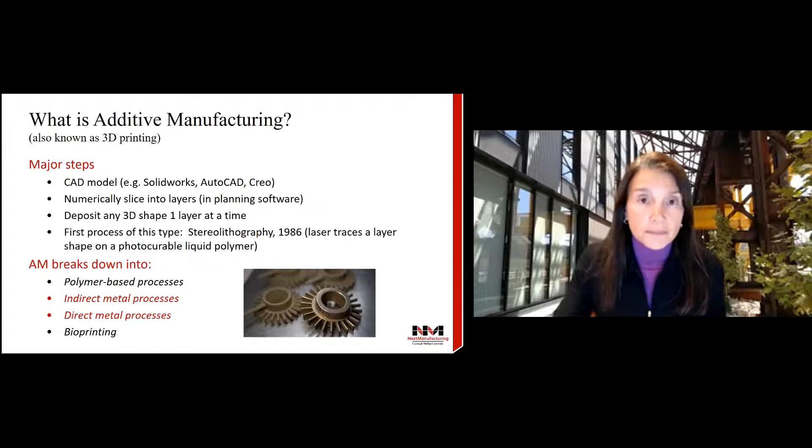So why all the interest in additive manufacturing or 3D printing? Even though this has been around since the 80s, there were a couple of developments about 12 years ago that generated a lot of interest in the population and in industry. The first was maker machines, desktop 3D printers for polymers or plastics that hit the market—MakerBots, Cube Pro, Form One. These were high resolution polymer machines costing about $2,500, some about $1,000 and less. Today you can get a desktop plastic 3D printer for home use for under $500, even just a few hundred dollars. They're popping up in a lot of middle schools, high schools, libraries, and community centers. Around the same time, automated metal 3D printers came online.

There were two different processes introduced at this time: one called a laser powder bed process, and the other an electron beam powder bed process. I'll talk about both as we go on. Both use metal in a powder form, much like cinnamon or flour in consistency—tiny metal particles. You use either a laser or an electron beam as the energy source to bind particles together as you print one layer at a time. I've got some videos to show you each of these processes. This was really the first time the industry demonstrated you could make a generic 3D shape automatically out of real engineering alloys—not just plastics, but titanium, aluminum, steel, nickel alloys, and other alloys in great use today.

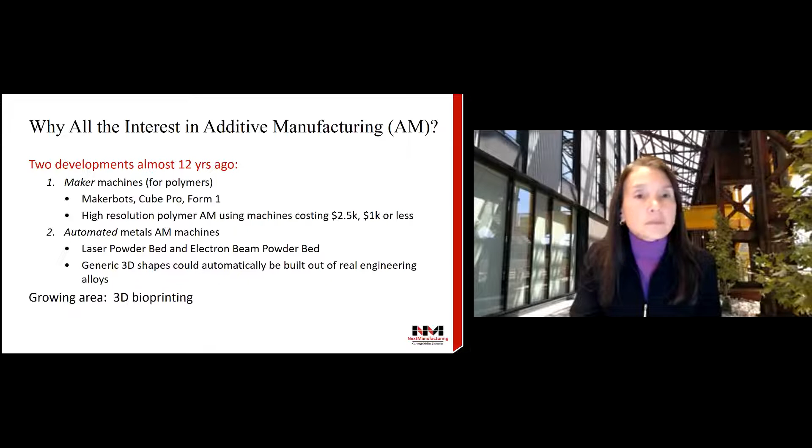Let's talk first about indirect metal additive manufacturing. These were the first practical attempts to make metal parts. Basically, you print with a powder and use a binder. Instead of using a heat source to make metal powders melt and stick together, they use a binder that's like a glue, then put it in the oven to solidify the whole thing. Then it has to go into another process, into a furnace, to really sinter the part—getting the particles to partially melt and stick to each other so you have a solid part.

This process was introduced by a local company, the ExOne company, which is in North Huntingdon, PA—actually one of our partners. These approaches are pretty well established, and there's a lot of research happening right now in this area. It's an inexpensive form of metal 3D printing and it has a lot of attention right now.

On the next slide, I'm going to show you a video of our binder jetting machine that we have in our lab, and I'll explain a little bit about how it works.

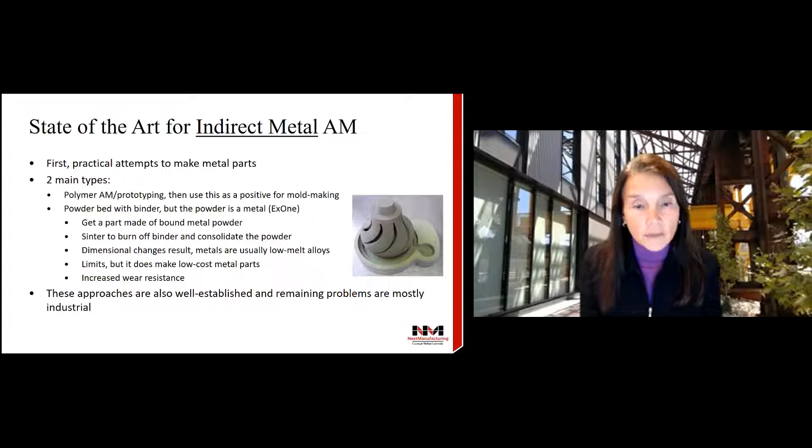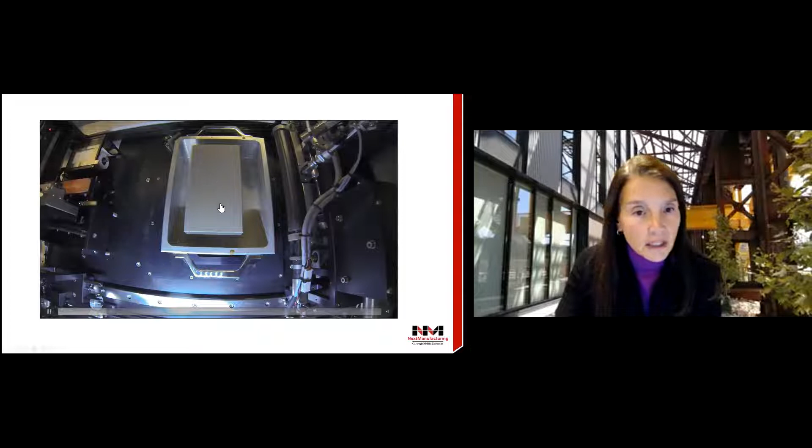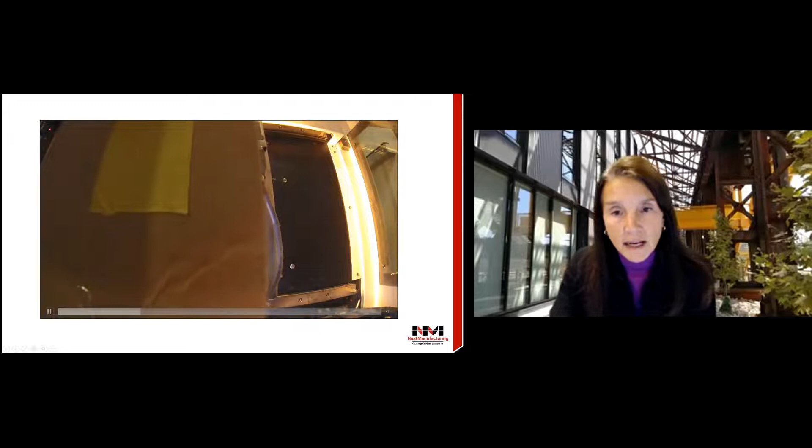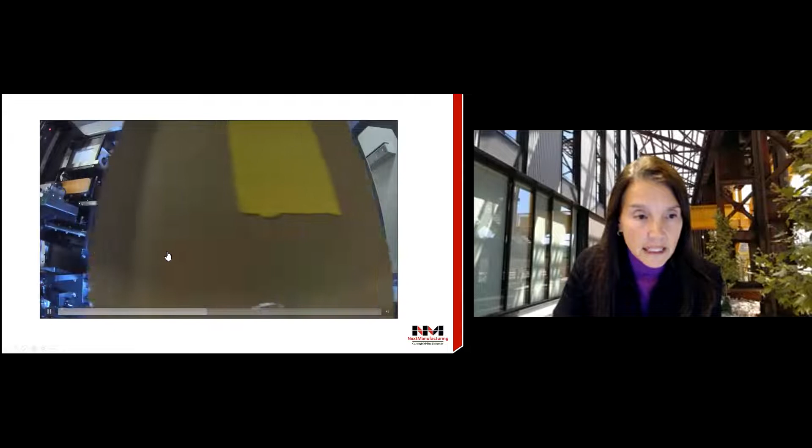This is one of our students, Luke, in our lab. What you can see is what we call a build box, and it actually has powder in it. In this area, this is a bed of metal powder—stainless steel powder that's just sitting here waiting to have a process done. So what's happening now is that plate had dropped down, and now we need to fill that area with powder. This is coming across, with a light that's preheating the bed a little bit. It's dropping a pile of powder in this area, and when it goes back, it's going to use a roller to spread that powder out nicely so that we have a very smooth, even layer.

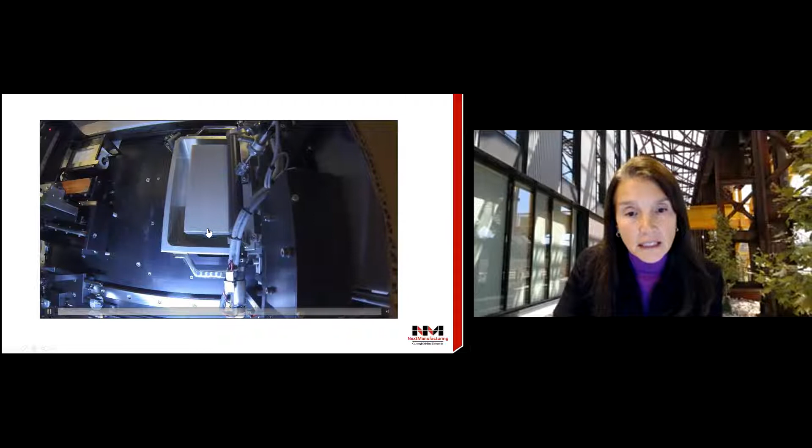So you can see the roller right here at the edge, the black roller that's rotating. And now we have a perfectly flat powder bed. Over on the left side, this is the printhead.

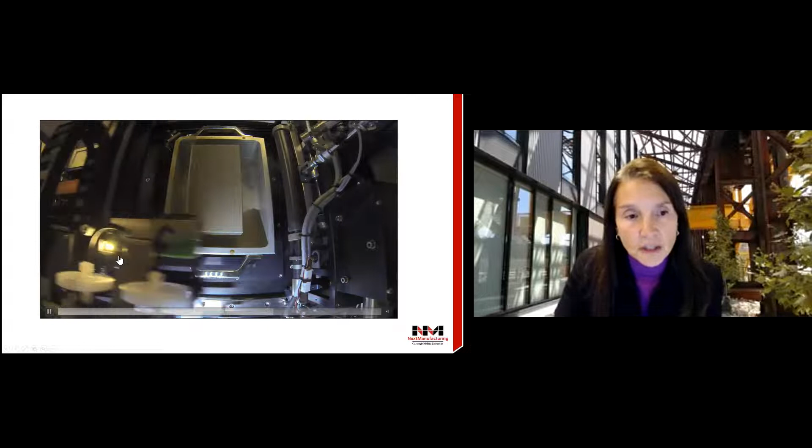This type of process actually works very much like an inkjet printer that you would have at home. So it comes out, and you see the head is going back and forth, dropping binder particles, or glue droplets basically in the shape of a circle, and they're going to do many of them at once.

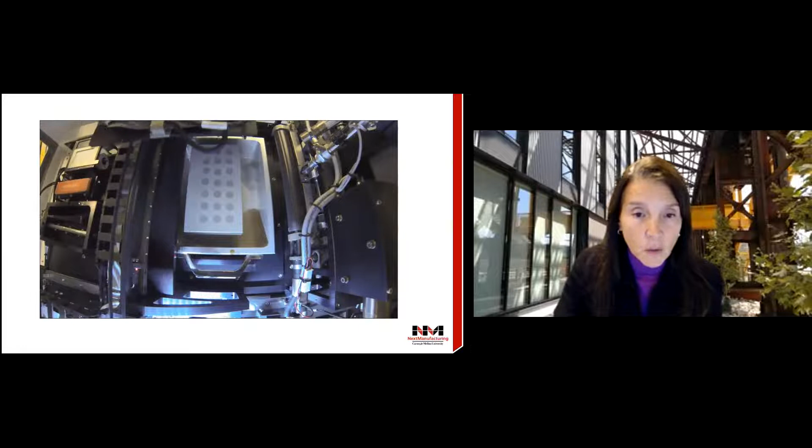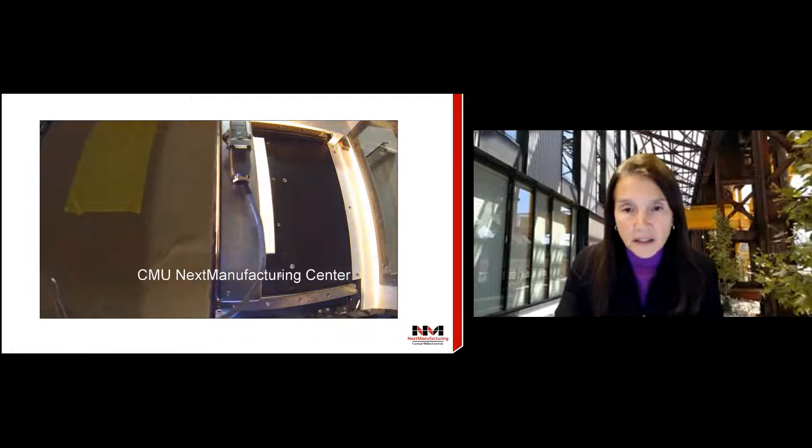This was a part that we were building, the bottom of which is a disc. It's going to go through this multiple times: it drops down, spreads another layer of powder, the binder comes out, it drops in, and it continues going until it builds everything that was in the original drawing and programmed into the machine. This is a fairly inexpensive process and also very easy to use.

Next type of metal additive processes are direct metal processes. These are processes where there aren't a lot of intermediate steps, where you just directly print the shape. When you take it out, it's basically done. You don't have to consolidate it with more material, and you don't have to put it in the furnace for another process to get to your finished part.

With this process, you can make all kinds of very complicated structures. You can print designs that you couldn't possibly machine out of traditional machining steps. There are some limitations, though. While there's a lot of design freedom, as you can see the little sphere of a lattice that we have here, that would be impossible to machine or to just make out of a chunk of metal in the machine shop.

The few drawbacks to this are that parts can take a long time to build. This is a pretty slow process. And if you want to build a lot of parts, or if you want to build a large part, it can take a day, it can take many days, it can take a week.

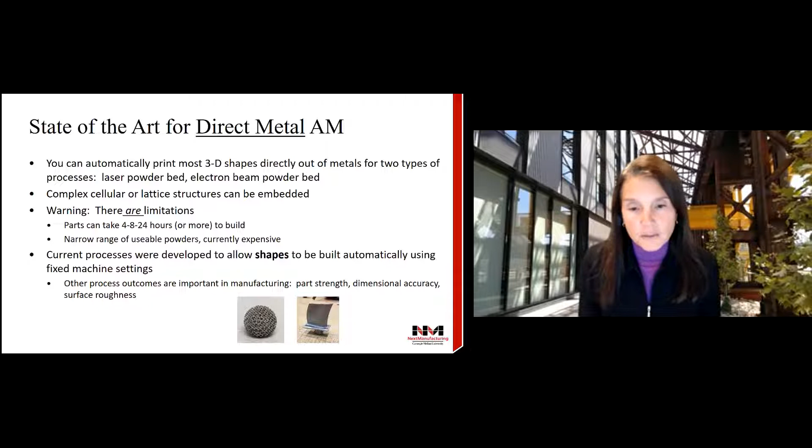So of the direct metal processes, there are a few different kinds. These use what we call a metal feedstock, which is the starter material. There are some processes that can use wires, like a welding type of wire as a starter material, and many others that use powders, as you saw in the other video. I'll show you these different types of processes, and each one is best for different types of parts and different reasons.

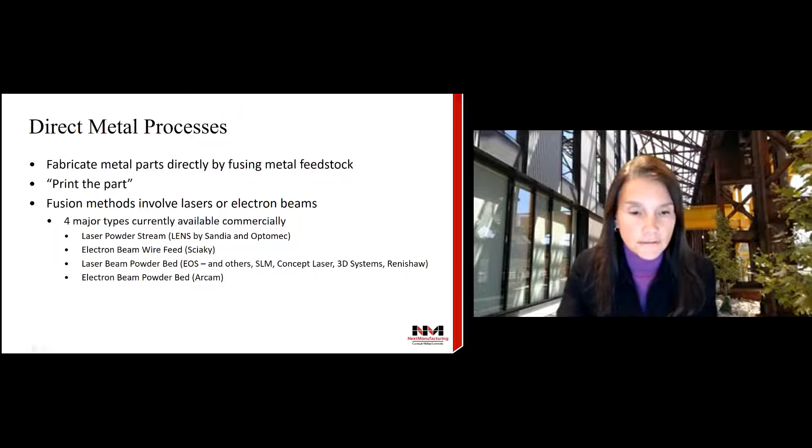This first one is called a powder stream process. As you can see from these nozzles, it's actually streaming powder particles, like shooting them almost like an aerosol, streaming them down. There's also gases in there that help protect the powder so it doesn't oxidize along the way, and also make sure that it's directed to where it needs to go.

This is the first direct metal 3D printing process that was developed, and it's typically used for repair. So it's very easy with a process like this to start with a part that is broken, that is missing a chunk of metal from it, and to fixture it in the machine and allow a process like this to add material back where you might have lost some in a failure.

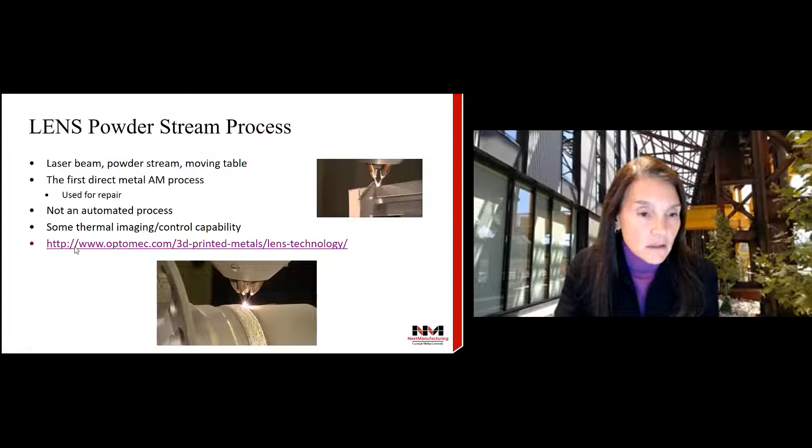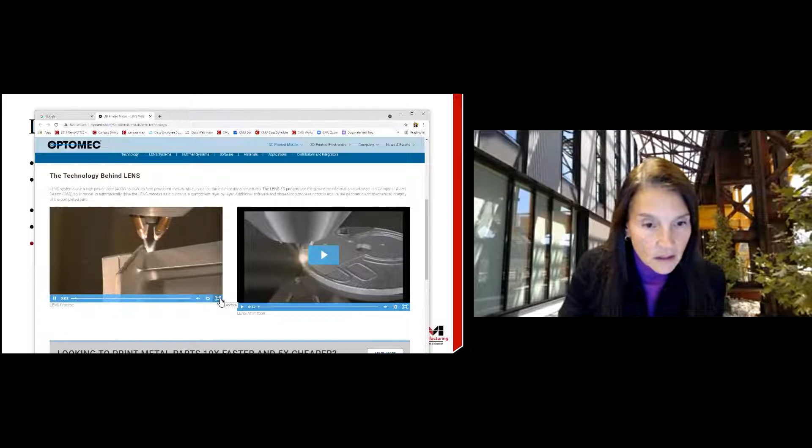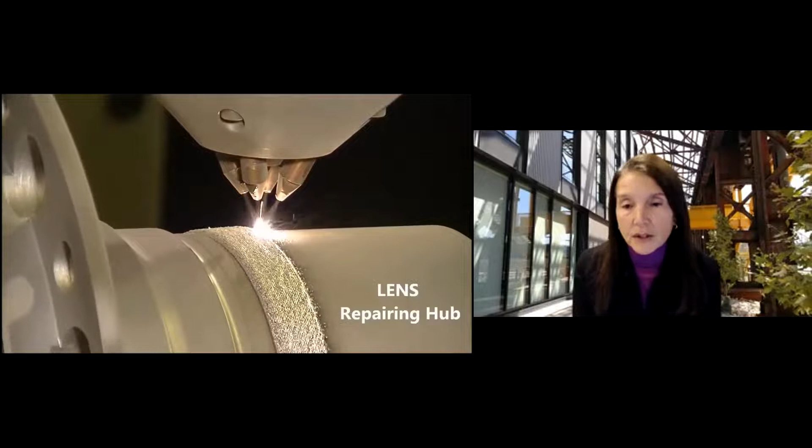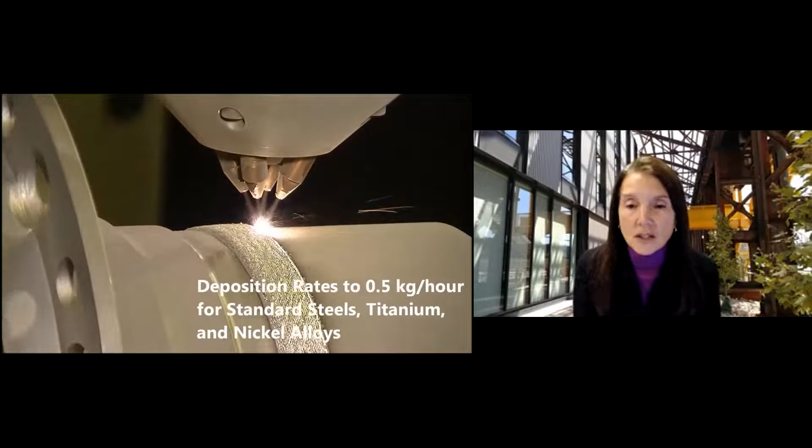So you can see with this process that it goes pretty fast, and you can lay down a good bit of material at once. This is a part that had been chipped on its edge, and now you have these nozzles spraying powder, adding material to an area that needs to be repaired. Often at the end of this process, you have to go back and machine it so that you have the final dimensions you want, so it's as smooth as you might want. But it's very simple with a process like this to repair parts and add material where you may have lost some, or even build up material from scratch.

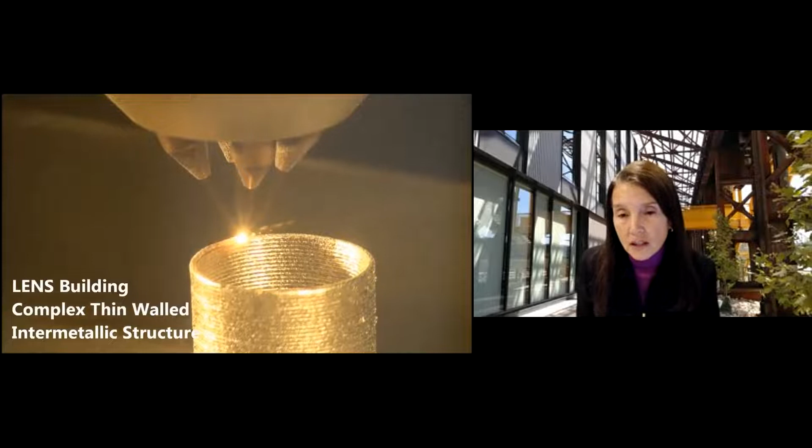And here you can see it's making a process that's actually pretty thin. This would be finished, machined down to something smooth at the end. Alrighty.

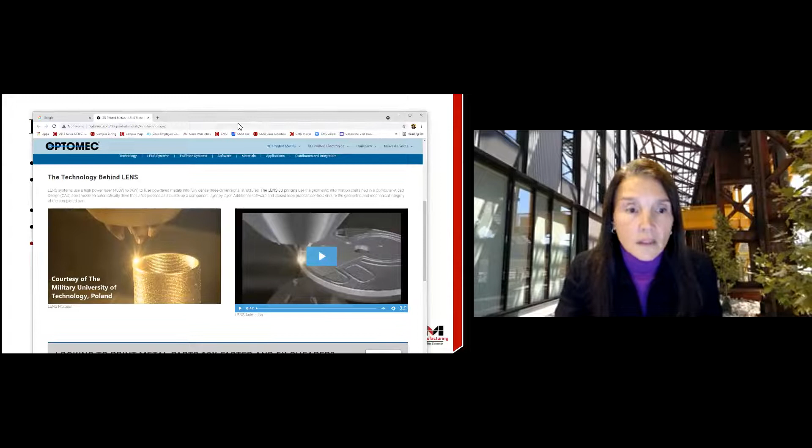It's the fastest process as far as building up material goes. Of all of them, it's not particularly automated. It requires a lot of planning, a lot of computer programming, and planning on the machine. But it is really, really good for very large parts.

There are times in certain industries, especially in aerospace, where a company would normally use a very large forging or a cast part. These days it can take anywhere from 6 to 18 months sometimes to get the material you need in that size. You could actually use this process to create that material, the big blank basically that you would need to then machine. You can lay down material in a way that brings it close to what we call near net shape, close to the finished shape you want, and then you can just machine it after that. So I'll show you how this works.

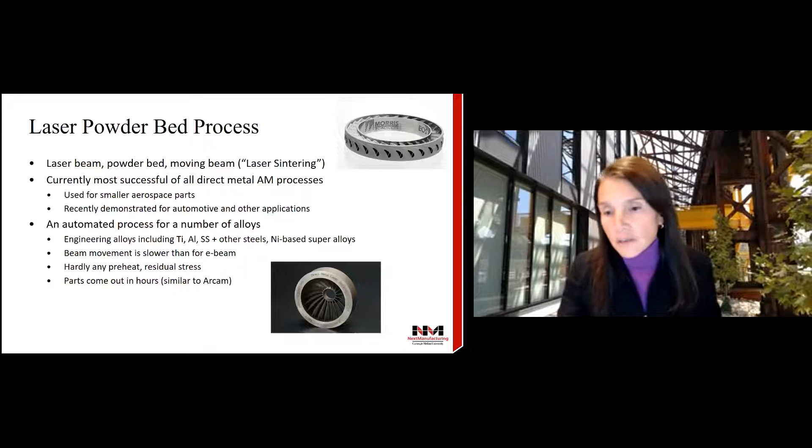You can use almost any available engineering alloy that you can get in powder form. That includes titanium, aluminum, stainless steel, tool steels, other types of carbon steels, and nickel-based superalloys used in very high temperature applications. It's a little bit slow, and it does require heat treat, so some time in the furnace afterwards. But the surface finish on these parts is fantastic, and the types of detail you can get, as you can see in some of these pictures, is really great.

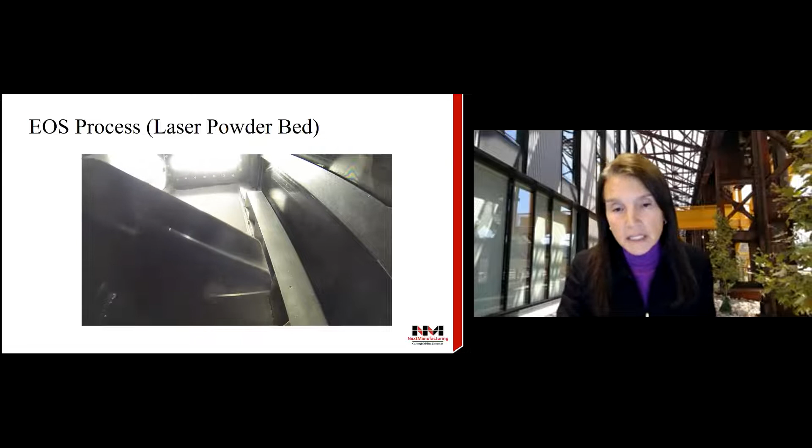And that continues on for however many layers your part might be. So for something small like this, where we're just building up some lettering on a plate, maybe you do 20 layers, maybe it'd be like an eighth of an inch tall. For building parts that are a couple inches tall, you're going to get 500, 1,000 layers. For a part that's like 5 inches tall, you're going to be looking at 5,000, 6,000 layers of a part.

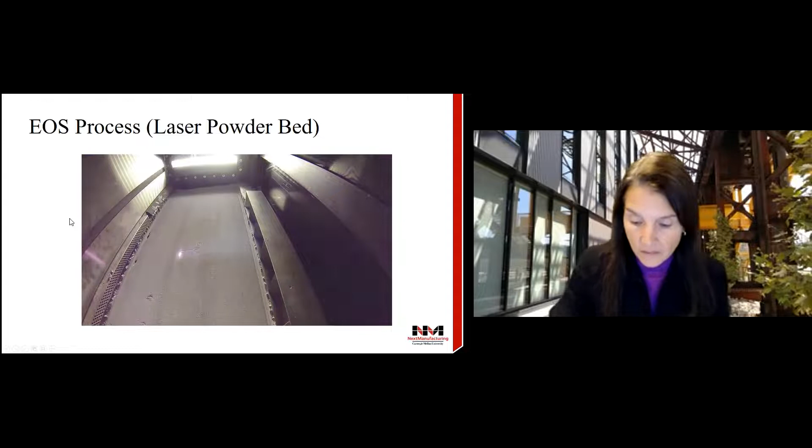The other fairly popular powder bed process is called an electron beam process. There's a company called Arcam that developed this process and manufactures the equipment for it. Arcam is now owned by General Electric, but the process has remained intact. So the only difference, really, one of the biggest differences between the last process, the laser powder bed process, and this one, the electron beam powder bed process, is just the heat source or the energy source. This uses an electron beam instead of a laser.

This process was actually developed, and we have some of this equipment. It was made probably around 2004, 2005 timeframe, and it was made primarily for printing titanium alloys and for use in medical implants. So this is the process of choice for hip implants, knee implants, other types of bone implants, where rough surfaces are good so that bone ingrowth can happen easily. This process produces, you can see in the photos, a fairly rough surface compared to the others, and that's on purpose.

So this is a very automated process. Again, it's made primarily for titanium alloys, and these are their alloys that are biocompatible and most often used in medical implants.

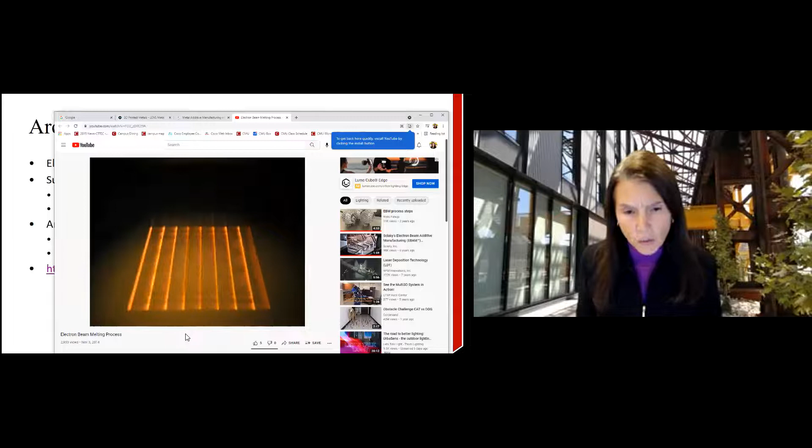So this is actually in our machine as well. This is a little bit hard to follow because right now it's preheating the bed, and what you see, the crazy mess there, is actually one electron beam scattering around so fast that it just looks like things flying everywhere.

And so you can see it's building out a layer of a set. This was a set of test samples for us, the cross section of which was a bunch of discs and then a bar. Those were going to be material test samples that we would use. So this process runs very much like the laser process.

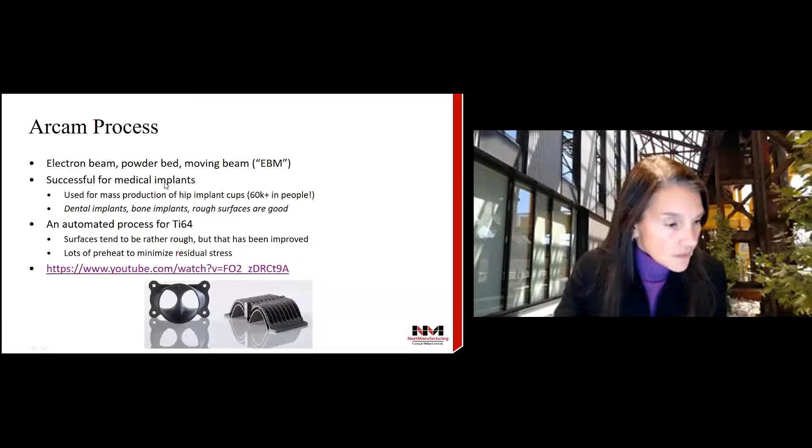Okay, so those are the main metal additive processes. Let's look at why somebody would even use this process in the first place. So there are lots of different things you can do with metal 3D printing.

One is build prototypes, and so you can use this for presentation models. If you're designing a new part and you have to show it to a customer or your sponsor, you can build functional prototypes. You can use them as visual aids. You can do fit and assembly models, so you can 3D print different components in your system and test fit them before you go into production.

You can 3D print tooling components. So there are a lot of times when a machine shop or a manufacturing plant or a manufacturer will need tools or molds in order to make parts, or just some sort of fixture or jig to attach things so that you can then machine them to attach a component that needs to have another process done to it.

And having tooling made by a tool and die company can have long lead times and can take quite a while. So if you can make your own tools and molds and fixtures and things in-house, this can save you a tremendous amount of time. You can also customize them to fit exactly the kind of component you want to hold or you want to work on.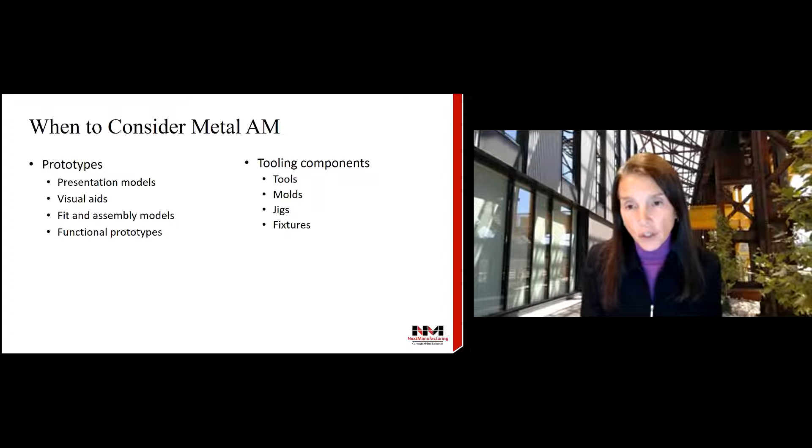And of course, you can use them for parts. But the point here is it's not just for parts. You can use them for prototyping to help with your design process, use them in tooling to help with your in-house processes, or actually print parts for sale for retail use and other customers. These are especially good processes for things that are low volume and high value, for processes and parts that need to be customized, because it's easy to design in customization. You can print really complex geometries and things that are impossible to make otherwise. So these are reasons to consider metal 3D printing in lieu of traditional manufacturing processes.

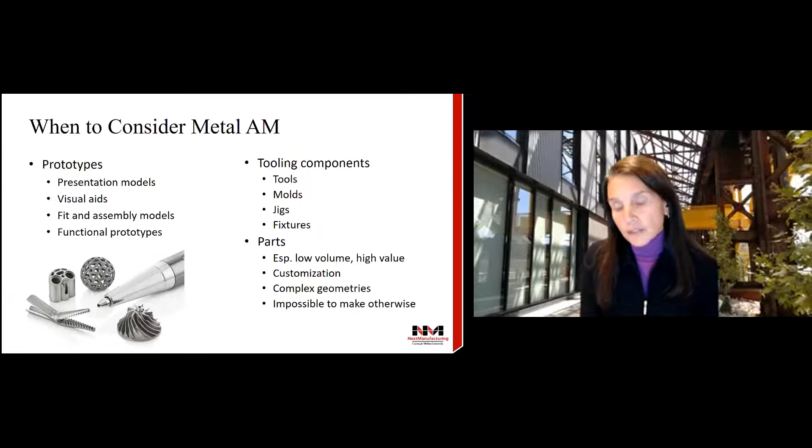So there are a lot of opportunities when you 3D print something. Rather than just 3D printing the part as it is today—say you have a part and you need more of them—if you take a part that's made by traditional manufacturing processes and just simply 3D print it without changing anything, you're probably not going to save any money. So what you really want to do is get more out of it.

So you can design it for performance. You can look at simplifying the design, or reduce the weight of it, because with 3D printing you only have to put material where you really need it. You're not starting with a big chunky block and ending up with extra material because you didn't machine it away. You're instead creating something almost from nothing. So you can just put material where you need it, and this naturally ends up with things being lighter weight.

Iterative design. By this, I mean you can design and redesign over and over again, and you can do this very quickly if you have 3D printing capability. You can go through the design process, design a component or a part, and then give it a try. You don't have to send out an order or go into production with it. You can just keep improving on the design very quickly, because 3D printing something may only take a day or a couple of days, whereas placing an order for something to get a test part may take weeks or months.

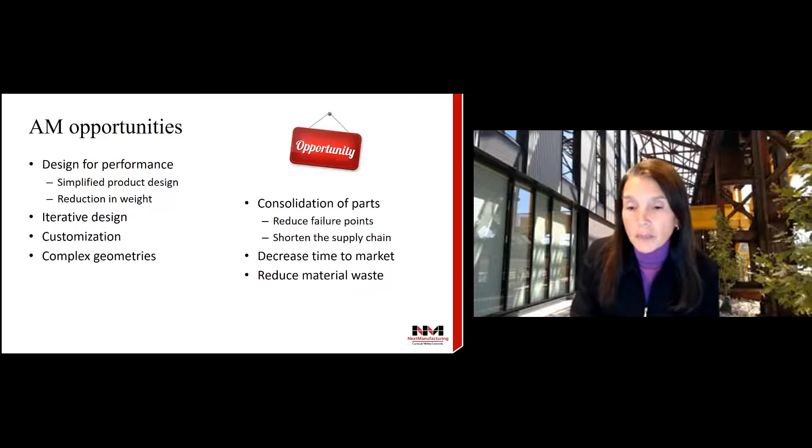And also you reduce material waste, because in the end, you're really only using the material you need rather than machining away material that you don't need.

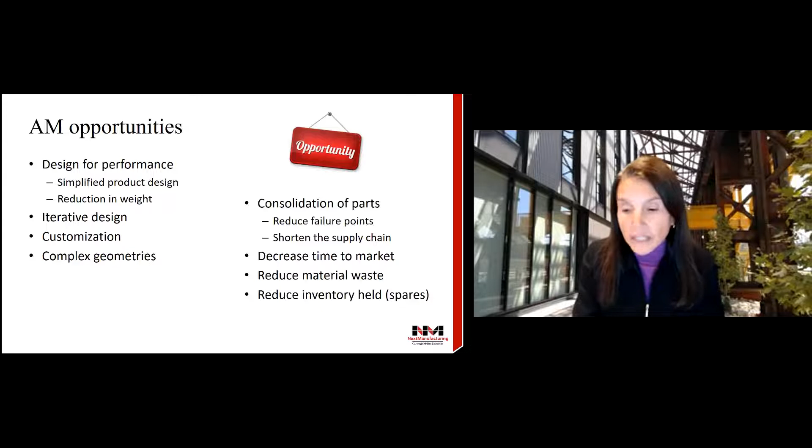And finally, reducing inventory, by which I mean holding on to a lot of spare parts. This is true of many manufacturers, true for our armed services, the Navy, the Army, just about anyone who produces parts has to have a lot of spares on hand, especially for parts that fail often. If you could just 3D print them when you needed them, you would not have to hold so much inventory.

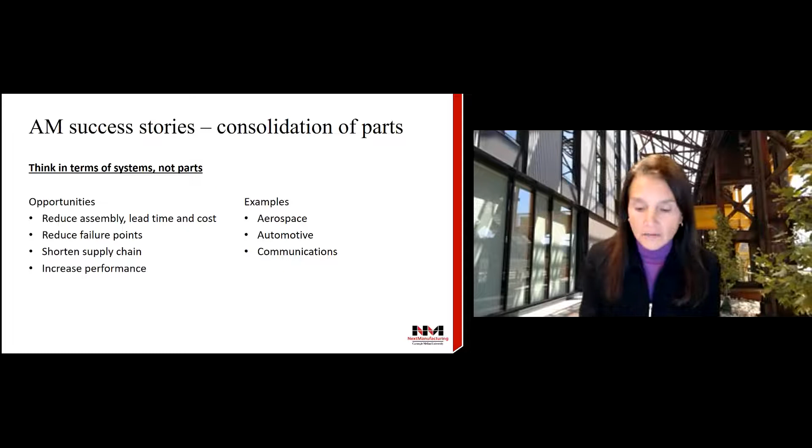The other area of opportunity for additive that I mentioned was consolidation of parts. This actually is one of my favorite reasons to use additive manufacturing. As I mentioned, you've got to think in terms of systems and not just parts. There are a lot of opportunities here, and I have a handful of examples of where this has been successful. So the poster child for consolidation of parts is the General Electric fuel nozzle.

You may have seen this in the news some years ago. The challenge here was designing a new fuel efficient jet engine with a very complex interior geometry, much too complex to manufacture. It consisted of over 20 parts that needed to be welded or brazed together to form the finished fuel nozzle. When they finished this design, they found it couldn't be made. They purchased a number of castings and tried to manufacture and join these parts, but were not successful at all.

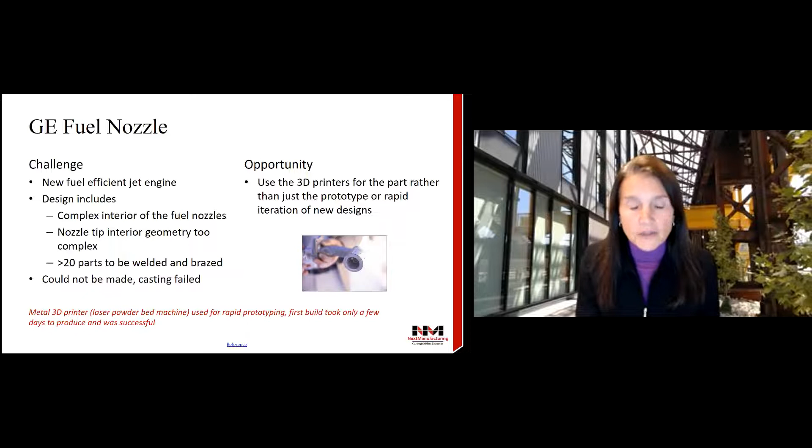So the opportunity here was to use a 3D printer for the actual part, rather than just for prototyping or rapid iteration and redesign, which is what they had been doing at the time. Instead, they looked at 3D printing the part itself. They used a laser powder bed machine for this, and the first build took only a few days to produce, and it was successful—after, I don't remember if it was months or years, of actually failing to make this design any other way.

Here's the final part. The solution was manufactured successfully. They managed to consolidate what was originally 20 parts into this one, now 3D printed as a single part. It is 25% lighter, 5 times stronger, and they improved fuel efficiency over the previous design by 15%, with a much quicker design process. So you can see they've had a fantastic amount of success moving to 3D printing with this design.

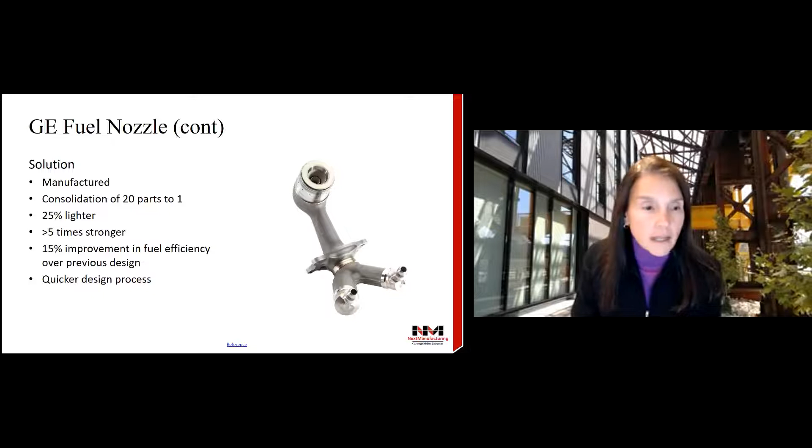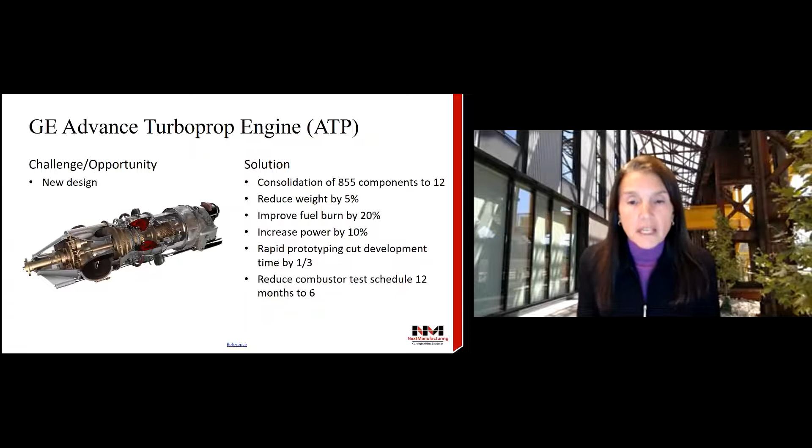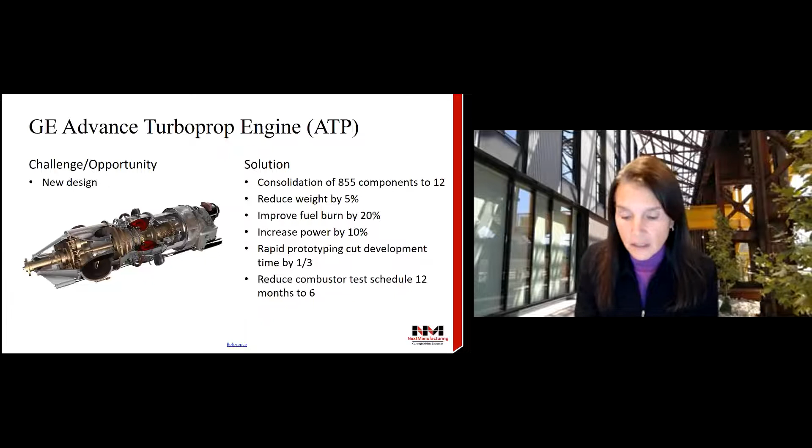So their solution was to look at this after the success of the fuel nozzle. They were considering 3D printing and looking at consolidation of parts, and they managed to consolidate 855 components down to just 12, reduce the weight by 5%, improve the fuel burn by 20%, increase the power by 10%, cut the prototyping development time by a third, and reduce their test schedule from 12 months to 6. This is another fantastic example of using 3D printing to consolidate parts and end up with enhanced performance, cutting down lead time as well.

Here's a different type of example in the automotive industry. GM and Autodesk partnered just a couple of years ago on their seat bracket—the bracket that sits by the side of your seat, where it fastens your seatbelt to the car seat itself. They had been looking at small upgrades, trying to make tangible improvements in this bracket so it wouldn't fail or come apart during use.

The opportunity here was generative design—meaning trying to automate, having an engineer work with a computer and some artificial intelligence to generate designs that optimize the part strictly for its performance. Not so much for its looks, but for performance: if you need strength in a certain place, if you need stiffness in a certain place, if you need it to be flexible anywhere, it generates a series of design options that you could then evaluate and recommend a solution from. This is a way to spit out a number of design options quickly.

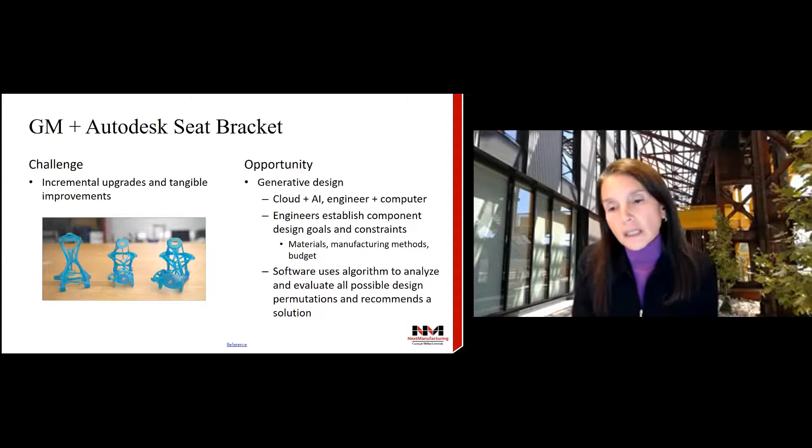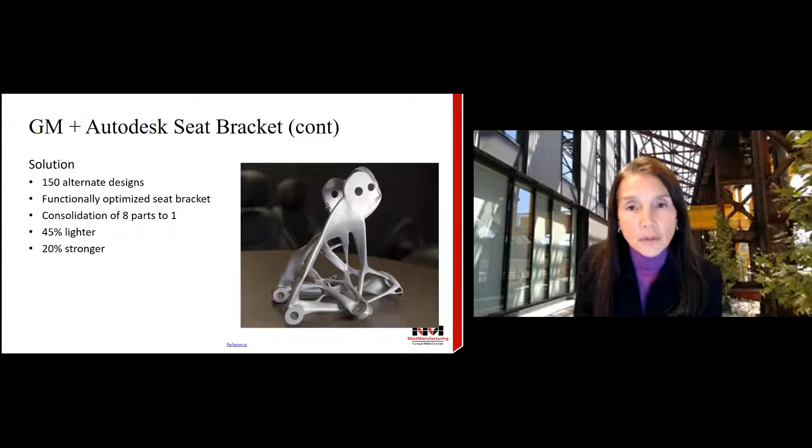They had the opportunity to look at 150 designs. They were able to functionally optimize this seat bracket, consolidating what used to be 8 parts into just one, and the end product is 45% lighter and 20% stronger. This was one of the first successes in the automotive industry of a metal 3D printed part going into service.

This is one of my favorite examples because it's just so amazing. This is an RF antenna, a radio frequency antenna—a very large system, the size of a very large backpack, and very heavy. Out in the field, someone in the Army, for example, would carry this around in a backpack so that they could communicate. The challenge here was to increase mobility and the performance of this antenna.

The opportunity is to replace this process that included multiple stages, including brazing, which is like a welding process, plunge EDM, which is a special type of machining process - 8 months of development, and 3 to 6 months to build. So what they wanted to do was redesign this very large, heavy, multi-part assembly, combining design, simulation work, mechanical engineering efforts, and software programs to optimize this design.

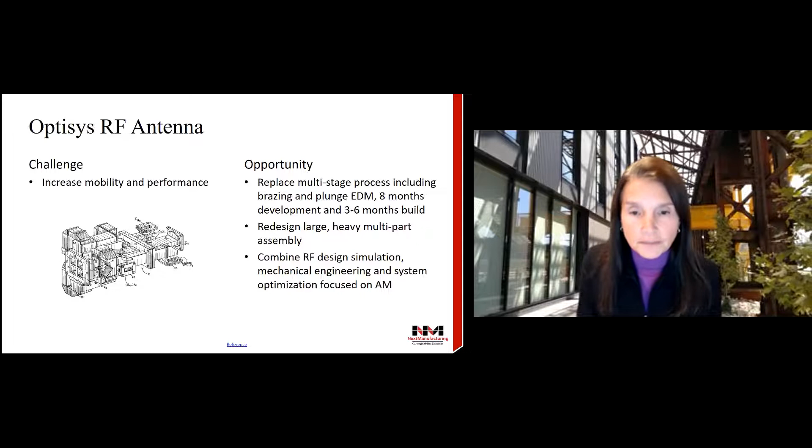Focusing on 3D printing or additive manufacturing, the result, in my opinion, was amazing. They consolidated something that was 100 parts down to 1. This is printed as is, shown as a finished part, and it reduced the weight by 95%.

So now what used to be carried around in a huge backpack can now be literally held in your hand. They reduced the lead time from 11 months down to 2, and the production cost was reduced by 20 to 25%. Non-recurring, upfront, one-time design costs were reduced by 75%. This is much, much smaller, and it has as good or better performance than the original part.

So finally, what's next for metal 3D printing now that it's out, and there are lots of companies working on making machines, and just about every company that works in metal manufacturing is looking at using it. There are a lot of us out there, particularly in universities, with active research areas helping to advance this field. Some of the areas we're working in include material development.

This industry really started with just a handful, maybe 7 to 10 typical engineering alloys that were used. There's a lot of research being done in developing new materials, whether it's adding certain elements or changing the chemistry of existing materials to make them stronger, more corrosion resistant, or more biocompatible, or using completely new materials.

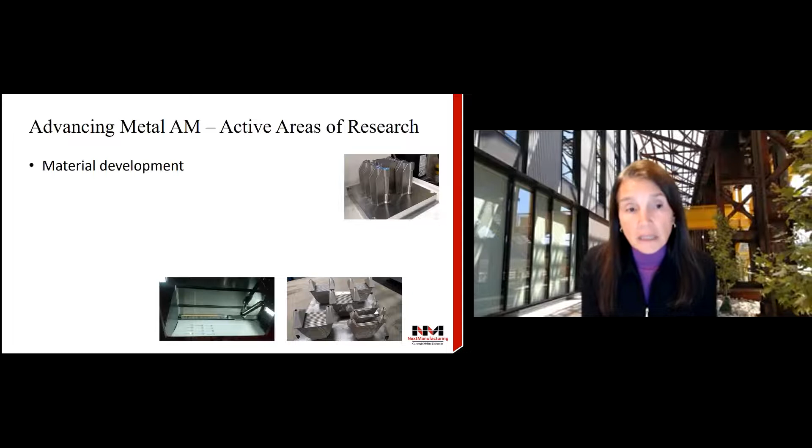There's a lot of what's called process monitoring and process development going on. This picture in the bottom center shows our laser powder bed system, and on the right-hand side you can see some hardware mounted in there - that's actually an acoustic monitor and a camera. So we do a lot of process monitoring.

We use cameras, we use pyrometers that accurately measure temperature, and we have acoustic monitors that record sound changes in the system. We use that information to determine what's going on in the process, and we're able to detect flaws, either visually or from temperature or even from acoustics we've learned to recognize, that allow us to change the process.

There are a lot of things you can change when you're 3D printing: the power, the speed, the diameter of the beam, how hot it gets in there before you print. You can put dwell times between layers if you need things to cool off. There are a lot of different things you can do to improve the process, and almost everyone who works in 3D printing research now is active in process monitoring and process development.

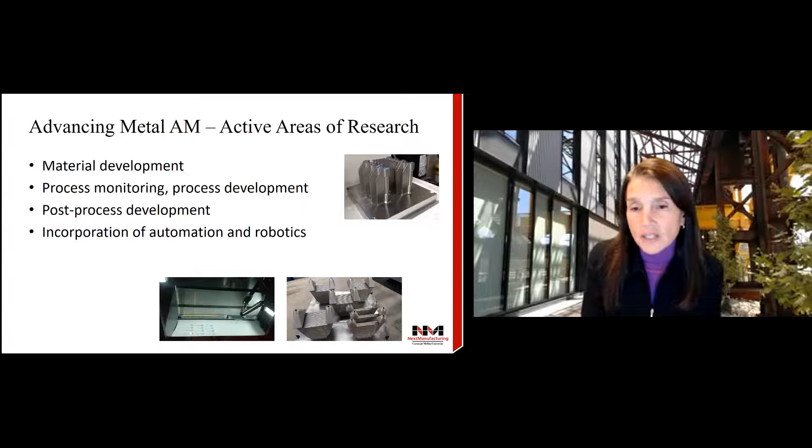Incorporation of automation and robotics - we're looking at trying to automate different parts of this process. This can be time consuming to set up and to clean up, so we're looking at using robotic capability to automate some of that.

Also applying artificial intelligence or AI, especially computer vision and machine learning, to additive manufacturing. This is a very visual and data intensive process - there's a tremendous amount of data you can collect, whether images, sounds, temperatures, or the build file logging every point, time, temperature, speed and power. Frankly, it's too much data for an individual to process. So we've been making tremendous use of computer vision and machine learning to process all the data from our builds, to better understand what's happening and to define parameters so you can set your machine and be fairly certain you'll have a part that prints successfully and is defect free.

One of the newest areas of active research in metal additive manufacturing is large scale additive. These powder bed processes especially have been fairly limited since they've come online these last 10 years, and building a part that's maybe a foot tall has pretty much been the limit for a while. Now there are machines coming online and other types of processes that are going to allow much larger scale manufacture of parts.

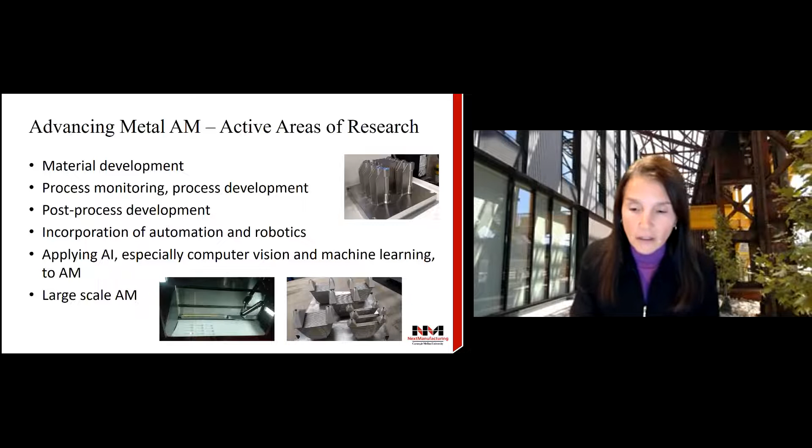Just one last thing to show you a little bit of a snapshot of an example of how we use computer vision and machine learning for reconstruction of data. So this part on the lower right, you can see the top half of it came out very well, the bottom half of it, not so much.

We actually have a software package that one of our students led the development of, that takes the images taken of every single layer of the part as it's being built and uses artificial intelligence and machine learning to analyze what it sees and identify different types of problems in that powder spreading process. In the laser powder bed process, you saw the recoater blade spread a layer of powder. It's very important that layer comes out really well, that it doesn't have empty spots, doesn't have debris, and that the blade doesn't hop and cause streaking. There are all different kinds of problems that can happen in the powder spreading process that then lead to problems in your part.

This is an example of using that data to make a 3D reconstruction of what was happening during the build, which lines up very well to what we ended up seeing in the end. This is a type of quality control inspection process that you can use even after the fact, to look at a part that you think came out great, just to see if something happened in the powder spreading process that typically leads to a problem on the inside that you can't see from the outside.

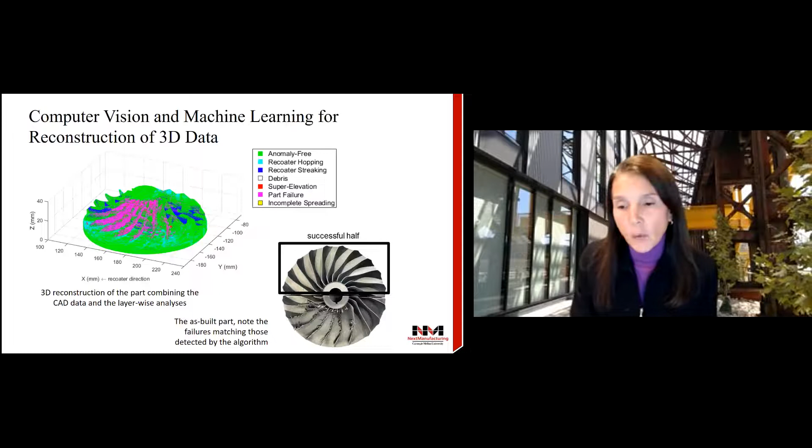So this is just one example of applying computer vision and machine learning to metal 3D printing in order to advance not only the process itself, but people's adoption and use of the process, so they feel more comfortable about what it is they're getting when they can't see inside of it.

In closing, there are a tremendous amount of opportunities for metal 3D printing: design flexibility and complexity, consolidation of parts, decreasing your time to market. Metal 3D printing can be used for all different types of things, including prototypes, tooling, and parts and components themselves. As we tell people when we meet with them to teach them about this and work with them on research projects, it takes training, it takes partnerships, and you should just jump in and get started.

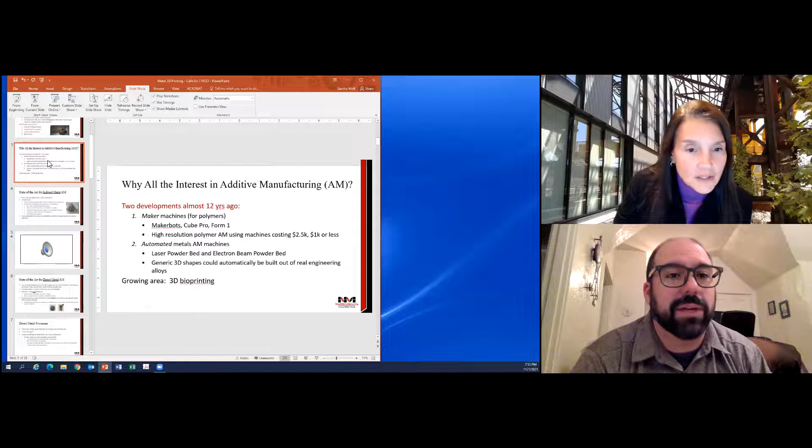But open source and free to download, I would try one of the simplest ones, which would be Blender. That's fairly popular, and that's a free download.

Inventor, I think, does Autodesk make that? I think that can also be used. Most students I know, when they're first transitioning into this, will play with Blender. I would say it's one of the easiest to learn. Some of these other ones are a little harder to self-teach, but I would try Blender and maybe Inventor.

Excellent. And I would imagine some of the other ones have specialty features you might discover you need once you get a hang of the more basic software. Yeah, you could, but you can even use a very basic CAD software package for stuff like this. A lot of these have other things with them that you don't necessarily need for this.

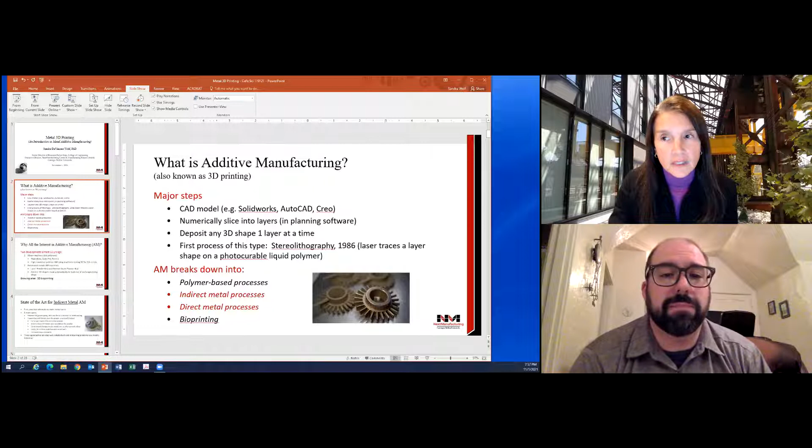Charles also wants to know if there are facilities in Pittsburgh that will sell you time on these machines. That is a great question. I will tell you that we do allow sort of outside projects in our lab and on our equipment. Now, it requires our engagement and use of our technicians and those of us who know how to run these machines, but we do have internal and external rates for that reason.

That said, a university will not print parts for you that you will then turn around and sell straight up at retail. Universities do not do work for hire, but we most certainly like to work with people to help prototype and test out designs, to do samples, things like that.

As far as other metal 3D printing vendors, there are service bureaus you can go straight to, and they will be less picky about what they work with. We even have, so ExOne, the company I mentioned, that's in North Huntingdon, they're one of our partners. They actually do 3D printing for Shapeways.

Some of you in the audience, if you've played around online looking at 3D printing, there's a website where you can go and even find pre-existing designs if you don't want to design things yourself, and you can literally order them through Shapeways. There are different service bureaus or 3D printing houses, including ExOne, that will print on demand by orders. It's like custom ordering something from Etsy or Snapfish, where you design what you want, put in the order, and it gets farmed out to where there's capability, and then it gets done.